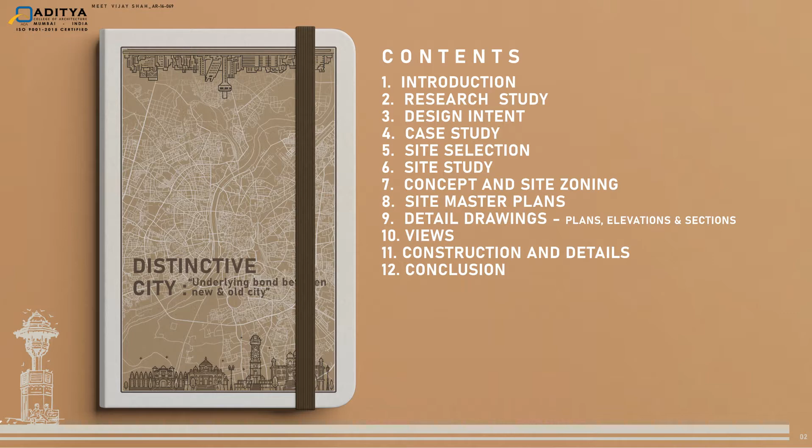Starting with the research study, a brief about the topic: this is a city-based thesis research project. Cities are a process of continuous evolution and development over a period of time. As a city continuously evolves, it carries certain social, physical, cultural, historical, economical, and conflict characteristics of its own. Constant change in a city by rise in population, expansion, development, urbanization and modernization leads to a certain loss of identity and characteristics for a city.

Now, talking about how to define a particular city, one can have a mental perception of a city and link it to one of its images in four variant city characters, which can be defined as follows.

The five physical elements of mental mapping of a city, from Kevin Lynch's book, The Image of the City: city impression, where a city is known by its people, their language, appearance and culture; city symbol and landmark, where a place becomes an image of a city; and city's collective identity, which differs from a local inhabitant to a tourist perceiving the city.

This thesis research presents a framework for understanding the relationship of a city's character and identity, taking the case of India as one of the unique cities, Ahmedabad, which beholds the uniqueness of being titled a UNESCO World Heritage City as well as a Smart City.

The city of Ahmedabad is situated on the banks of the Sabarmati River in Gujarat, India. The Sabarmati, being one of the longest rivers in Gujarat, divides the entire city into two parts: the western zone and the eastern zone, which are the new city and the old city.

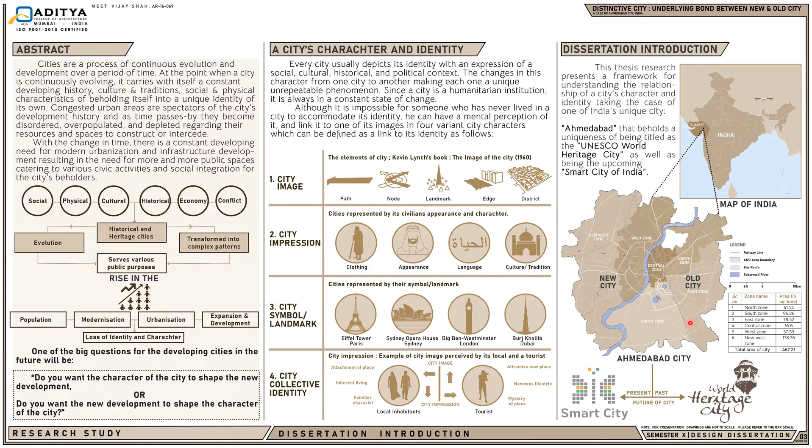For administrative purposes, the city has been particularly divided into six different subzones.

In order to proceed with the research study, it was conducted in five stages as listed in the research methodology chart: starting from literature review, then survey analysis, certain case studies, then site study, study of government proposals, then ending upon research inferences, which ultimately resulted in a site program derivation.

Here is the timeline study of Ahmedabad. The city beheld successive periods of political dominance under Mughal, Maratha and British rules, built upon the initial footprints of the Sultanate era. This historic timeline added a natural process of cultural exchange in the city over time, and the evolution resulted in a multi-layered and exceptional cultural significance of the city.

Talking about the evolution and growth of Ahmedabad, a mega city like Ahmedabad is progressing faster day by day in its expansion and growth. The city started expansion in the eastern part in the pre-independence period, that is the old city, and now it experiences expansion and surge in growth in the western part after the post-independence period, which is the new city, recalled as the new Ahmedabad city.

The two functioning government bodies have developed the Ahmedabad city over the past decade in various forms of planned growth and city expansion: well-developed road networks, civic amenities and public buildings, a well-developed public transport system, and land use and development schemes.

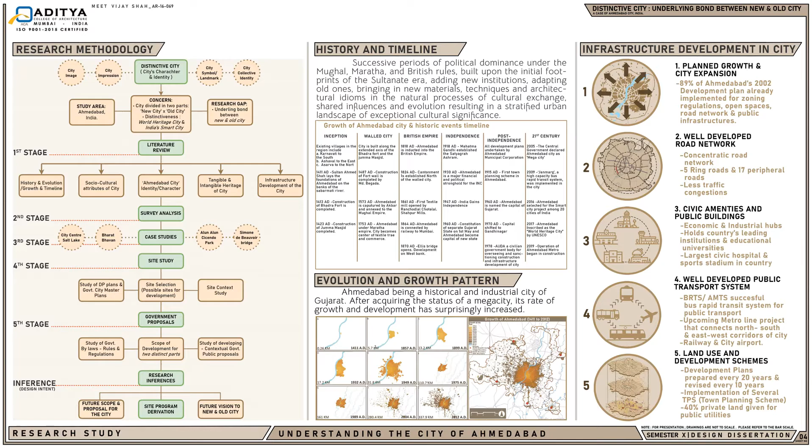Talking about the need for public spaces in cities: congested urban areas are spectators of a city's development history, and as time passes, they become disordered, overpopulated, and depleted in terms of their resources and spaces to construct or intercede.

With the change in time, there is a constantly developing need for urbanization and infrastructure development, resulting in the need for more and more public spaces catering to various civic activities and social integration for the city's residents. The municipal government body of Ahmedabad city has been constantly working on developing more public spaces to cater to the city's public needs.

The historic city of Ahmedabad consists of built heritage, which also forms a part of cultural heritage and has different tangible and intangible layers in the form of heritage complexes and sites, cultural landscapes, and intangible heritage consisting of festivals, people's lifestyles, cultural celebrations, rituals, and certain artwork inherited through practices in the city.

Speaking on the factor of tourism and development, ever since the city got the UNESCO prestigious tag of World Heritage, the footfall of domestic and international tourists has subsequently risen. This is the tourist development plan of Ahmedabad, where Ahmedabad also becomes a destination for domestic and international tourists to witness a lot of heritage and prestigious sites located across the entire city.

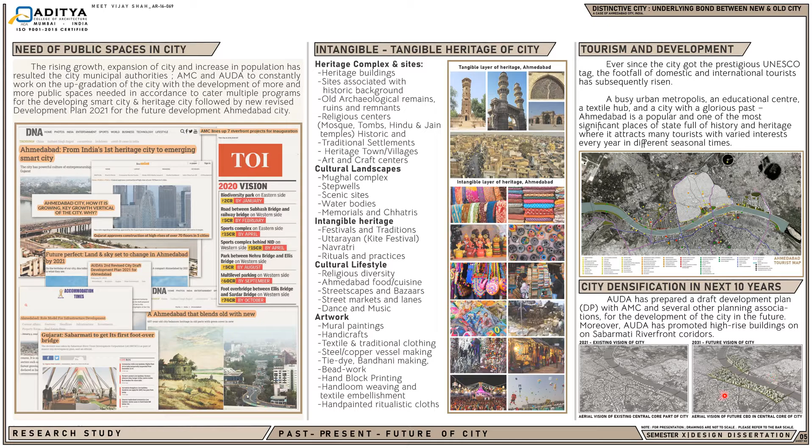Talking about city densification in the next 10 years, the city will experience more densification and high-rise growth in the central core part after the growth of an envisioned central business district as sanctioned in the development plan of 2021 by the government body of Ahmedabad. Thus, requirement of more and more public spaces in the city to cater to such large expansion and growth.

Now coming to the stage of design intent formulation. A study was conducted to analyze how public spaces become a government revenue model, where the city government initiates addition of public and civic spaces which becomes a self-revenue source model not only for the city government but as well as the city and its stakeholders.

If we talk about hypothesis, I conclude that the integration of various cultural, social and commercial activities, when fostered in the form of a modern contemporary landmark, can bridge the underlying bond between the new and the old city as a future-proof development, balancing the identity and historic characteristics from the past towards an impressive future for a developing city.

Bridging the gap between the new and the old city in case of Ahmedabad, certain parameters for design consideration were evaluated first before starting with the designing process.

Characters and identity of the city were extracted to translate them into resulted programs that will be ending upon a design conclusion.

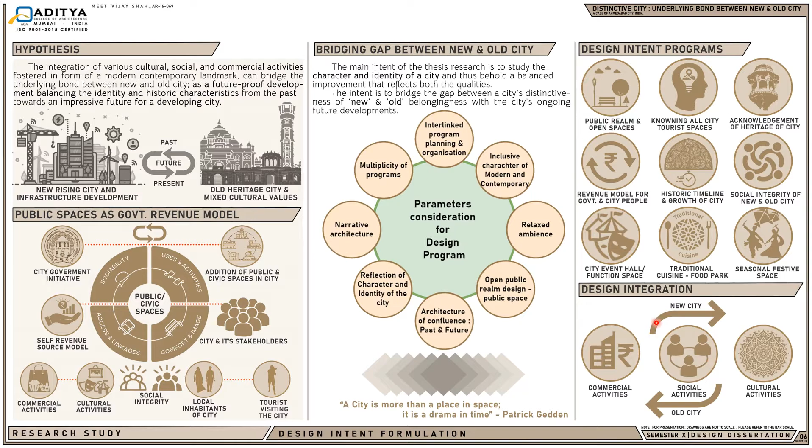And thus, a design proposal was established with the focus on integration of commercial, cultural, and social activities that exchange its value between the new city and old city of Ahmedabad.

The research study involved conducting several case studies, among which two were domestic and two were international. The prime focus of case studies was to study the different parameters and functioning of public projects in response to their context. The conclusion of the case studies resulted in the identification of different programs and scope of development for public spaces in a city.

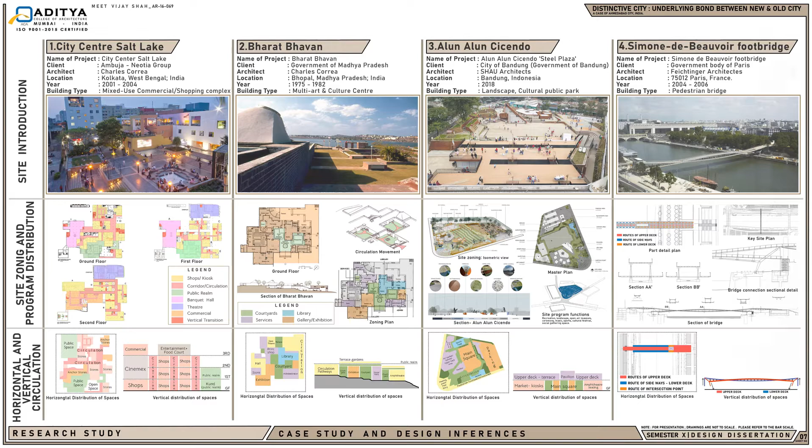Now, talking about site selection and site study, since it's a public space development proposal, the site was selected in the central core part of Ahmedabad, well connected with all the sub-regions. The Sabarmati riverfront corridor has always been a prominent heart to the city of Ahmedabad, fetching the development of more and more public space proposals on both its riverfront edges.

The idea was to select two sites, one on the western edge in the new city and one on the eastern edge in the old city. Both the existing sites selected are connected by the medium of an existing proposal of a pedestrian bridge in the central part of the Sabarmati river.

Going ahead, mapping was done of all the government proposals in the Sabarmati riverfront corridor context to our selected site, so that our design proposal doesn't overlap with any of the existing government public space proposals in the city context.

Then study of existing site sections were done where both the sites have similar characteristics of lying next to a riverfront, with three levels formed due to an upper promenade, a lower promenade, and then our raised selected site, which is 5 steps above the level of the upper promenade on both the riverfront edges.

After the selection of the site has been proceeded, as the selected sites fall under the context of a new city and old city with two distinct edges, several image mappings of the nearby site context plots had been done. Mapping of all the historical landmarks, public spaces, public transport mediums, and heritage spots was done.

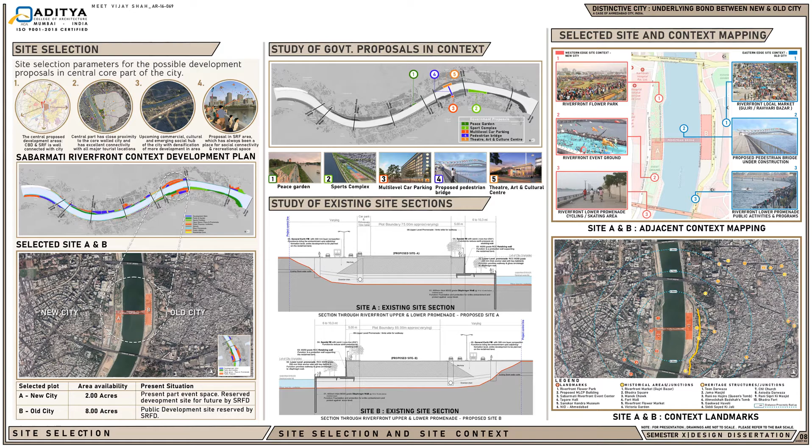Site study and selection involved working on different layers of contextual mapping in the form of the location plan, figure ground mapping, road network plan, climatic analysis, contour mapping, and site accessibility map, where the site has so many access points in terms of the riverfront promenade edges as well as the road, and then comes the central pedestrian bridge.

This aerial view basically explains the entire site in detail, where Site A, which is a 2-acre plot, lies in New Ahmedabad city, and Site B, which is an 8-acre plot, lies in the old Ahmedabad city; in the central part they are being connected together by the medium of an existing pedestrian bridge being developed by the government body.

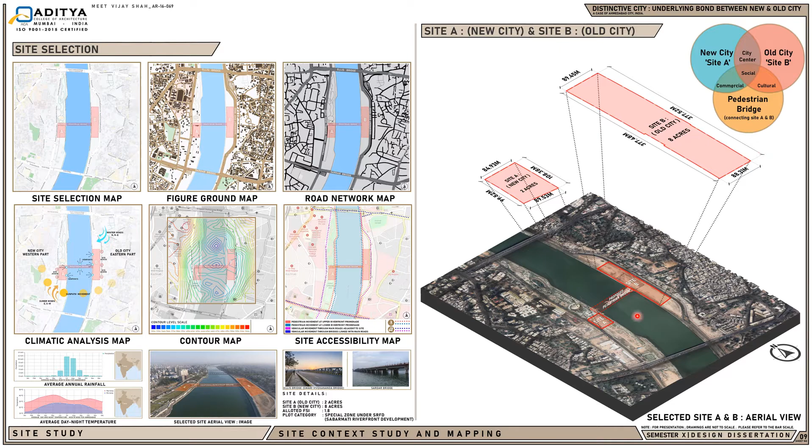The focus is to make the new city plot, Site A, having commercial activities, connected with the old city plot on Site B, having cultural activities, where socially they get integrated together by the medium of an existing proposal of a pedestrian bridge being developed.

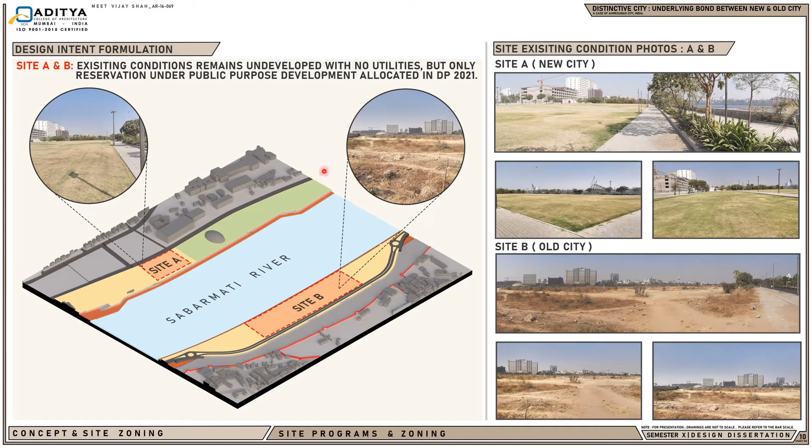Coming to the stage of design intent formulation. Here on the slide are shown images of Site A and Site B. As we can see, the existing conditions remain undeveloped with no public utilities on both the ends of the selected sites, but only allocation under public purpose development zones in DP Plan 2021.

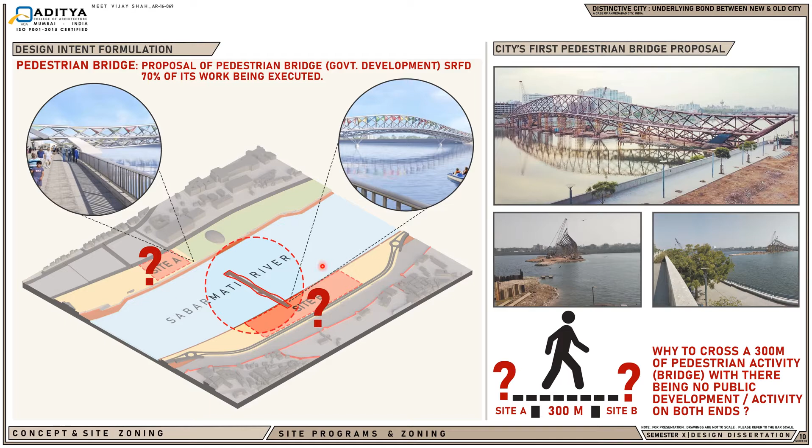Here comes the present scenario where there's an existing proposal of a pedestrian bridge being developed by the government body of the city. 70% of its work has already been developed, as seen in the images on the right hand side corner. The question arises: why would someone cross a 300 meter pedestrian bridge with no utilities or public spaces developed on both riverfront edges?

Concluding our hypothesis, we state that future proposals of public space development on both distinct edges will be connected by the medium of this existing pedestrian bridge proposal. Thus, we integrate cultural activities on Site A in the form of an urban heart and city seasonal plaza, and commercial activities on Site B in the form of a city civic center catering to various public activities, socially connected by the pedestrian bridge linking Site A and B together.

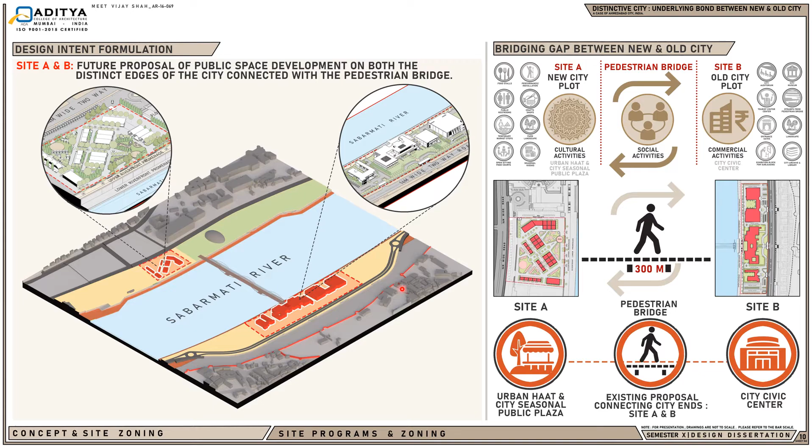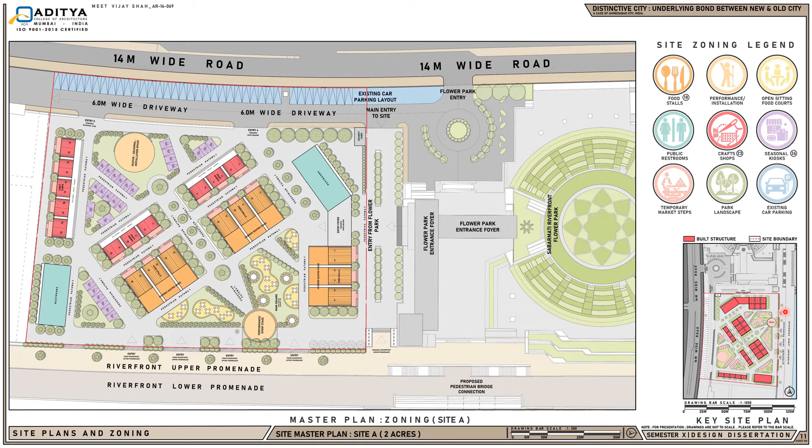Now understanding the proposal of the urban heart and city seasonal plaza on Site A, there are many programs spread across the entire site, namely food courts, open sitting spaces near these food courts, permanent craft shops, temporary seasonal festival kiosks, performance area and installation spaces, and a distinct landscape spread across the entire site. Understanding the site's program derivation, we go by a vacant plot near the Sabarmati riverfront edge.

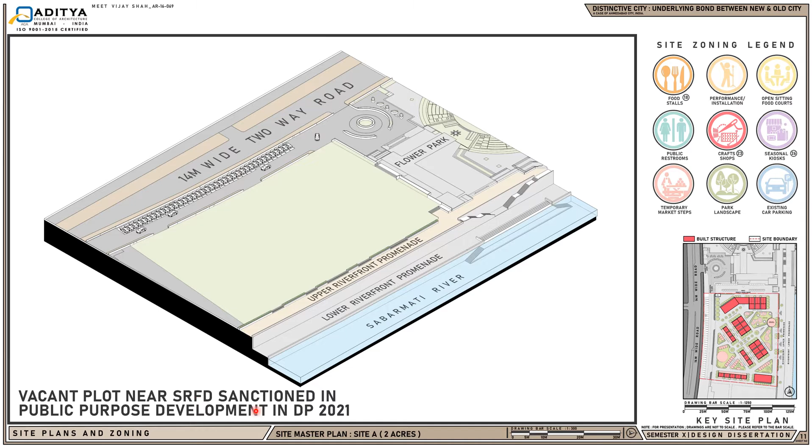This plot has been allocated for public purpose development in the DP Plan 2021. Our site has been demarcated. There are existing multiple entry exit points from all four corners of the site. The site has been diagonally divided into two parts connecting two distinct entry exits diagonally.

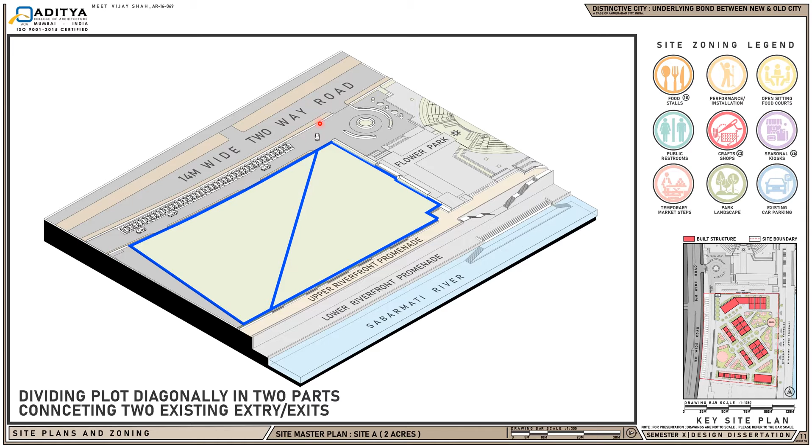Formation of public movement access around the existing entry exits was done. Allocation of subdivided plots was done. Equal distribution of green spaces was done along the pedestrian movement accessways.

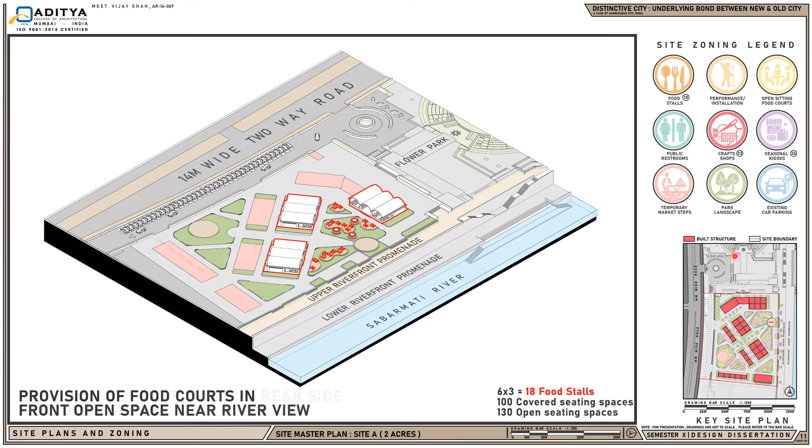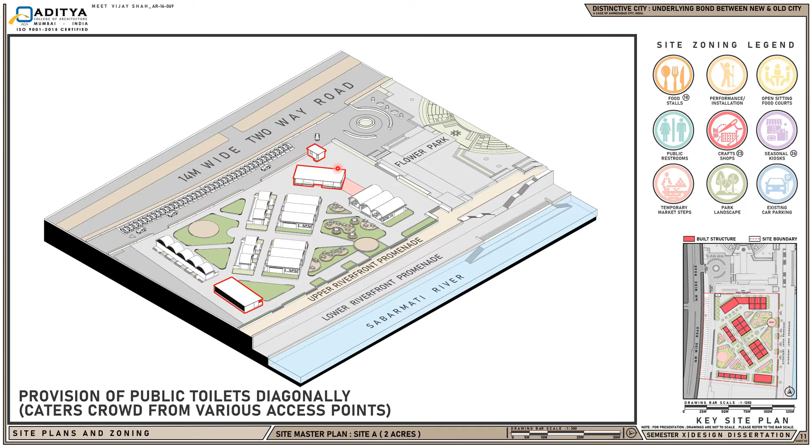Start of the design stage begins here. 18 food stalls and open sitting spaces have been allocated towards the riverfront view. On the rear side of this plot, permanent craft shops have been allocated. Then come two diagonally placed public restrooms which cater to people coming from all four entry exit points.

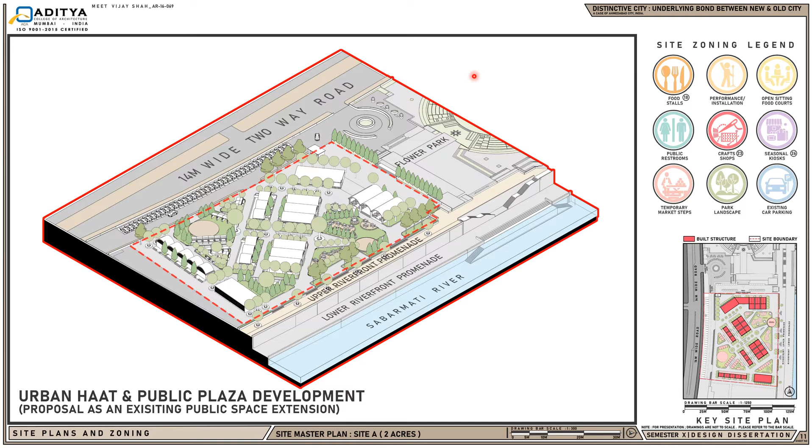Lastly, provision of seasonal temporary kiosks was done at the back end. A largely distributed landscape area has been spread across the entire site so that it becomes an extension to the existing public space, which is a flower park on the right hand side end. In total, it becomes an urban haat and public plaza development proposal.

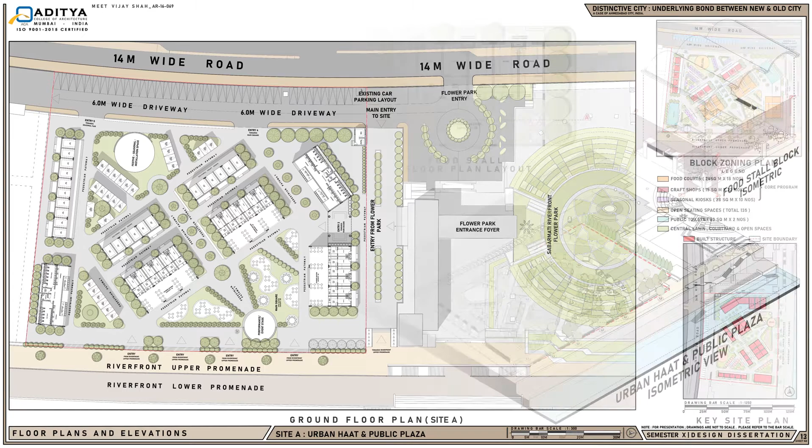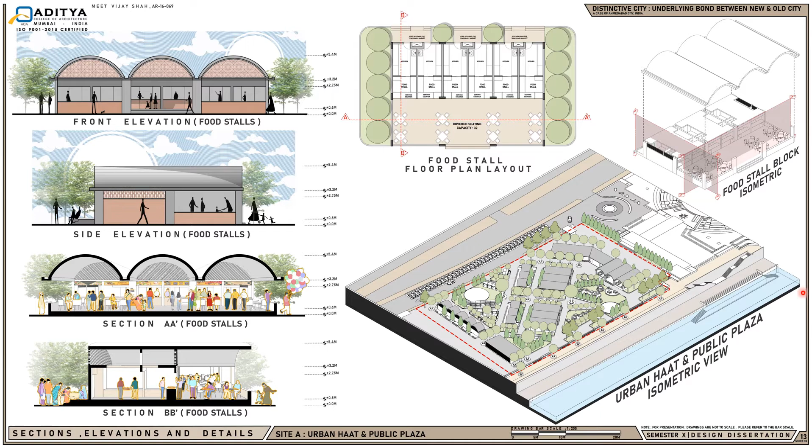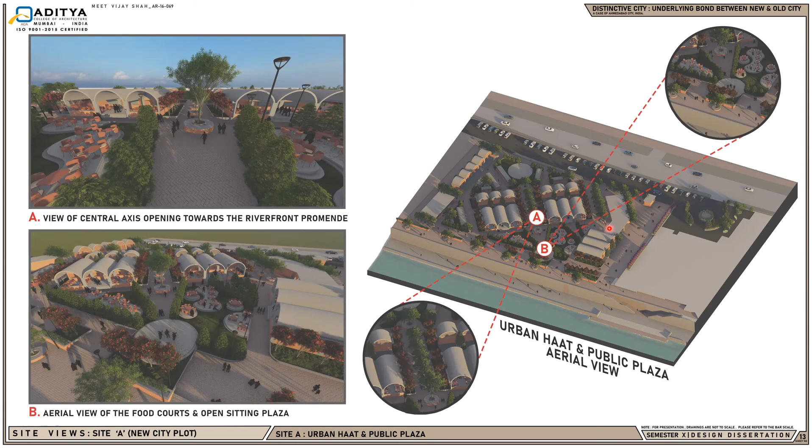Now coming to the design conclusion of Site A, which is an urban haat and public plaza. This is the view of the central axis which opens up towards the riverfront promenade. The second view provided here is the aerial view of the food courts, with a view of the riverfront end.

The next views provided over here are demarcated for the food stalls which are provided on the frontage. Above is the exterior view of the open sitting spaces and below is the interior view of the food courts.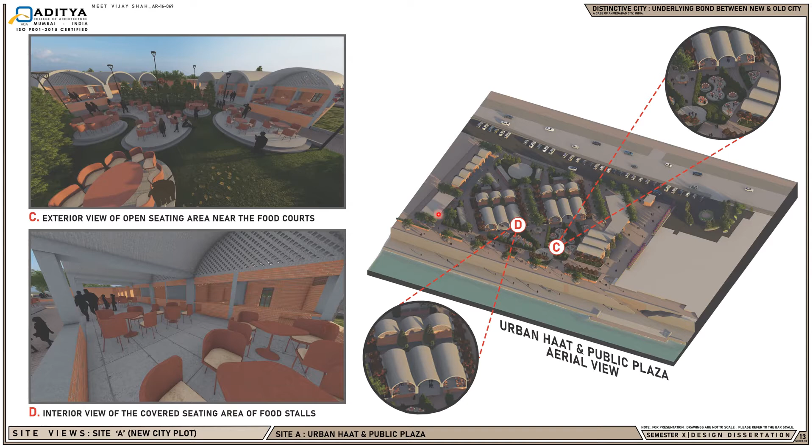So like the lower promenade, the upper promenade with multiple entry exit points towards this public plaza being developed, which becomes like an extension of an entire landscape also being developed throughout the entire site just right to a flower park.

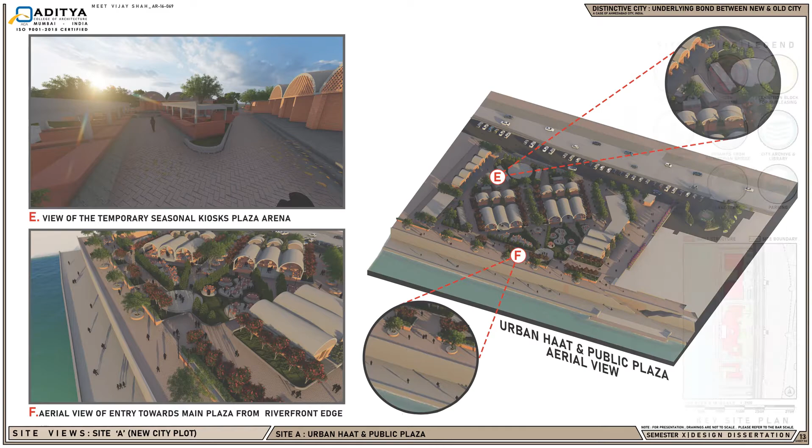Now coming to the design proposal of Site B, which is a civic center, it caters to various public development programs spread across the entire site of 8 acres plot, namely an auditorium and a multipurpose event hall. In the central part, there is a city museum, a tourist visitor center, and an exhibition gallery for subleasing.

In entirety, it's a single block divided into three zones. At the back end, it gets connected by the medium of the proposed pedestrian bridge on the fourth-story level. And lastly, on the left-hand side edge, we have a city archive and library and research center.

This entire plot has been divided into different zones. To understand the same as per form derivation, we go hereby. There was a vacant plot near Sabarmati riverfront sanctioned in public purpose development in DP 2021.

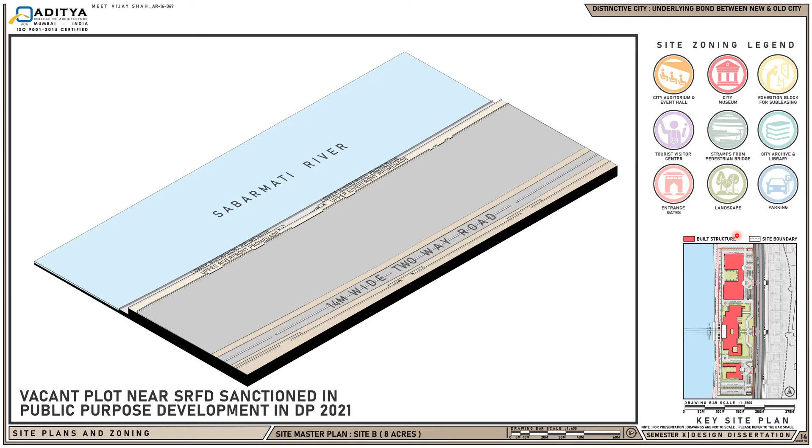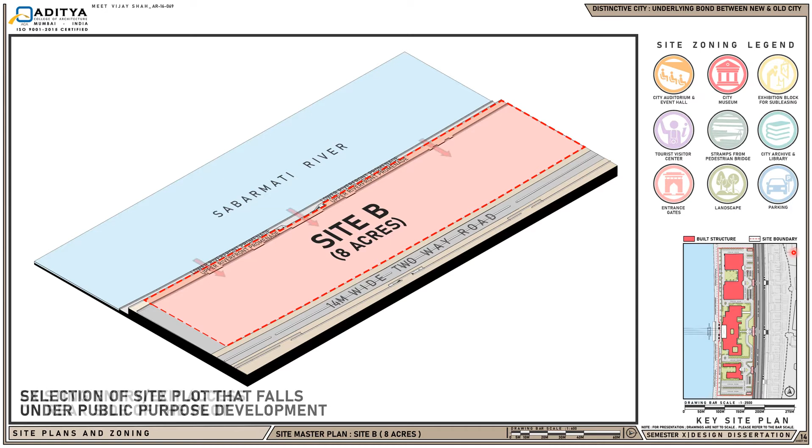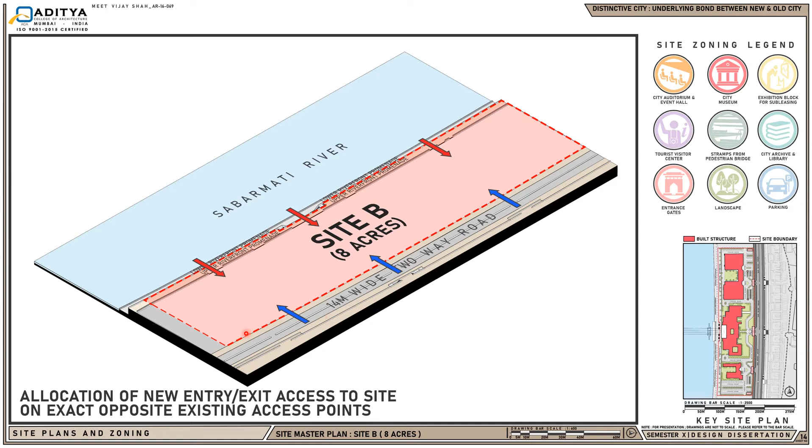Our site gets demarcated at 8 acres. Over here, the upper promenade is also a part of our site since it is not yet developed. Later on, there are three entry exit points coming from the upper promenade. We demarcate three more entry points proposed which are coming from the frontage of the roadside, exactly opposite to the existing access points. The entire plot gets subdivided into three parts.

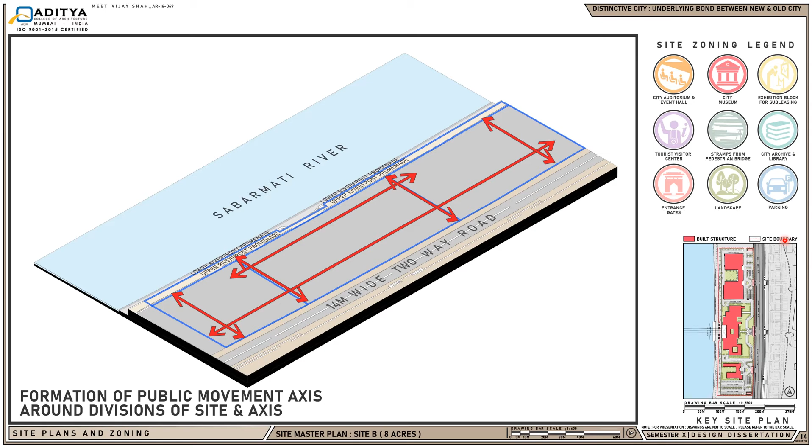Formation of public movement axis around the division of site has been done. Later on, the entire site gets subdivided into three different blocks, which are A, B, and C. According to the area required for the certain program distributed, all the blocks' space area has been allocated.

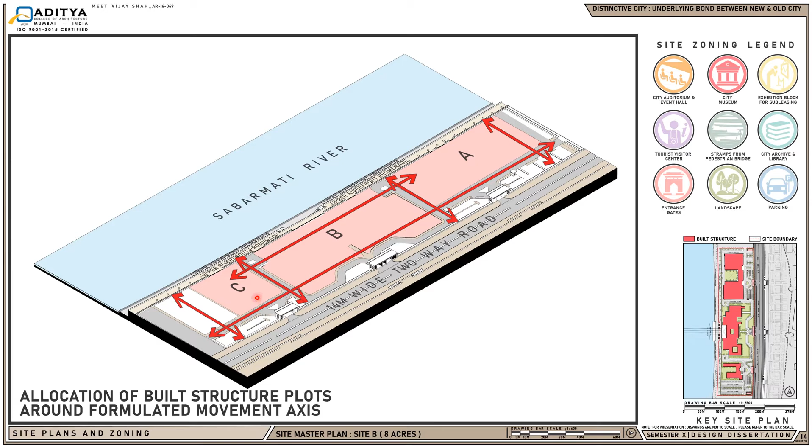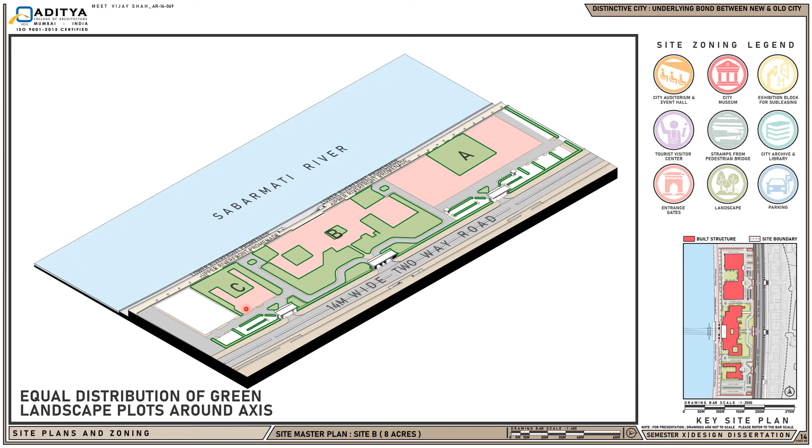Later, provision of equal distribution of green landscape plots has been done on the frontage as well as on the rest remaining two blocks on the rear side too, towards the riverfront. Provision of parking spaces on the frontage and sides to shorten the access distance. For block A also we have a basement parking.

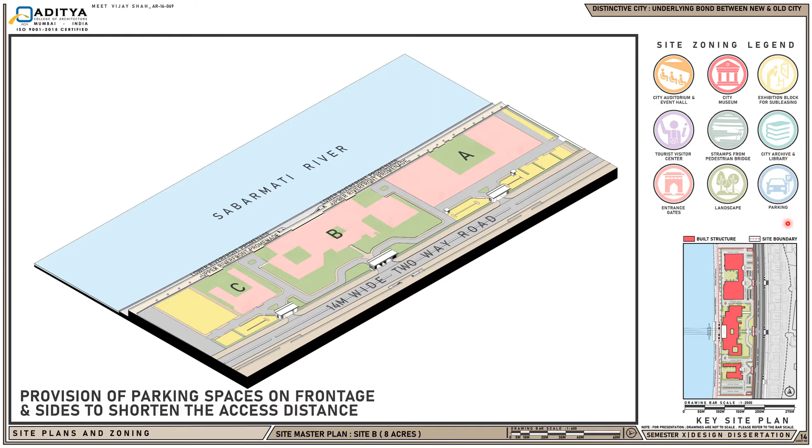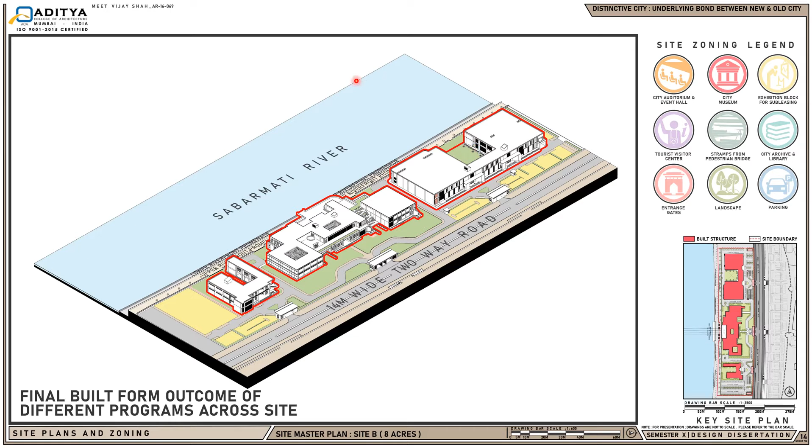And then comes our building blocks, namely the first A block is our auditorium and multipurpose event hall having a central courtyard opening towards the riverfront. Then in the central part of the site we have a city museum, a tourist visitor center, as well as an exhibition gallery for subleasing.

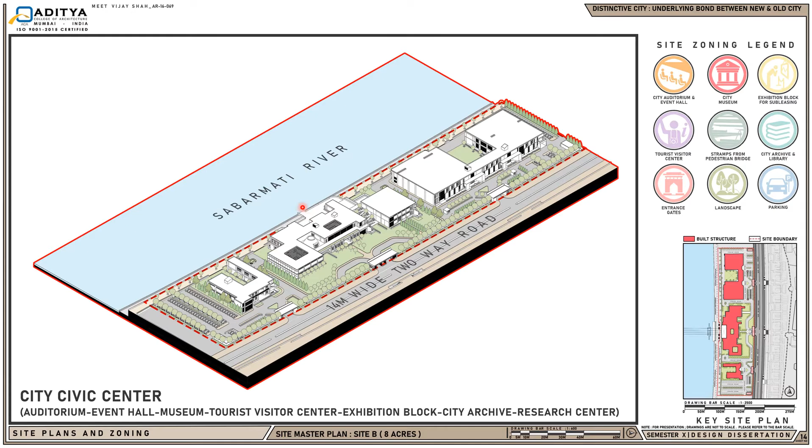At the back end, it gets provided and connected by means of an existing proposal of a pedestrian bridge on the first floor level with an exit provided in the form of stramps for people continuing to the end. And on the left-hand side, we have a city archive and library.

Now understanding the detailed drawings of Site B individual blocks. This key site plan on the right-hand side bottom corner helps me to relate with whichever building block we are discussing on the slide.

Basically, this is the ground floor layout of Block A, which is a 750-seater auditorium as well as a two-story multipurpose event hall. This is a government self-revenue model building which caters to several programs, functions, and events of the city.

If we see this block, there are two entries provided on the frontage from the roadside. This block zoning plan indicates the two core functions, which is a 750-seater auditorium and, in color blue, the two-story multipurpose event hall, which is pushed at the rear side towards the riverfront.

The entire two blocks get connected by the medium of a centrally divided open space, which is an open courtyard, which becomes a private space with a view of the riverfront to cater to several functions.

In this elevational profile, as we see on the frontage where there is this auditorium lobby, waiting lounge and pre-function space. This entire space has been incorporated with double story height as well as passive cooling techniques.

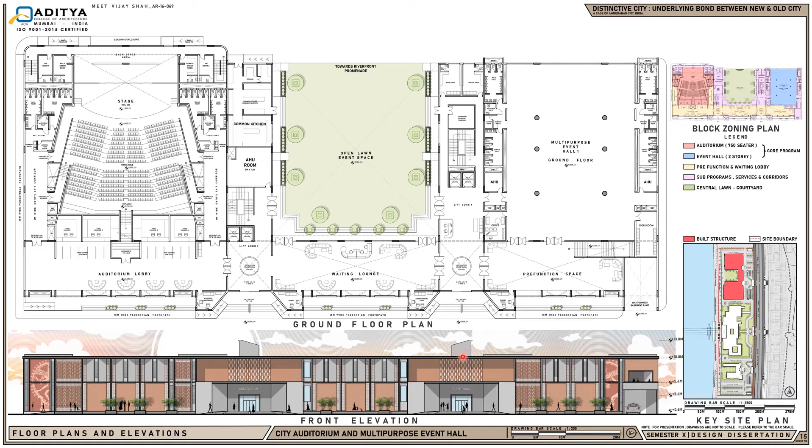The first floor layout of the building block, where the elevation provided on the bottom is of the rear side elevation facing towards the riverfront end.

The central space, which is the courtyard, helps me understand how it becomes a self-shaded space due to the double-heighted building volume. Over here, this is the two-story multi-purpose event hall having a glass facade completely opening up towards the riverfront view.

This is the auditorium back end where all the backstage services happen, as well as the green rooms, which have been provided on two different levels, opening completely towards the riverfront end.

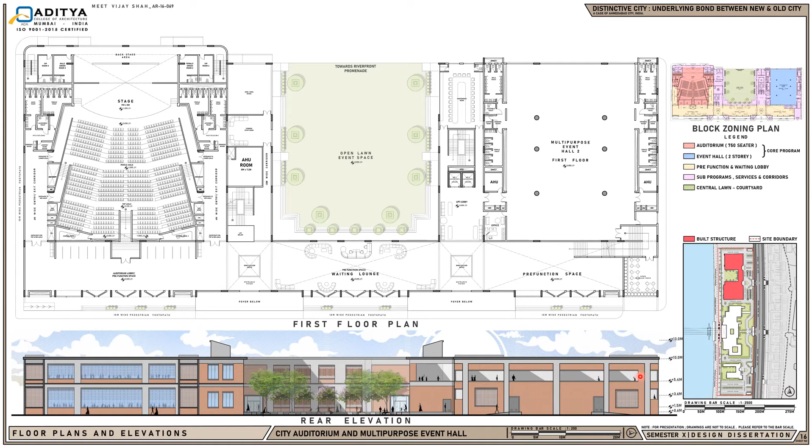Now coming to the basement layout of the block that we discussed earlier. Basically, this is a car park basement divided into two zones. As we see in the color-coded basement zoning plan on the top right-hand side corner, the red color on both the edges of the basement indicates a stacked car park system.

In the central part there is a single car park system, since the floor height in the central part is low due to a central courtyard above, as we see in the below sectional profile, which helps us understand all the different levels that function in this basement profile.

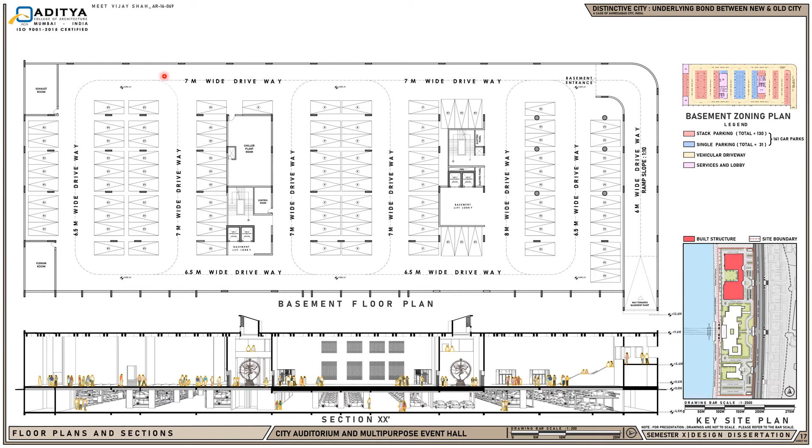The yellow color being highlighted is all the circulation route for the vehicular entries and exit in this particular basement layout.

This slide indicates the section cut through the central core of the auditorium and the section cut through the central courtyard of the building block.

As we see in this first section, on frontage this is the waiting and entrance area with the waiting lobby provided. The entrance directly leads you towards the top aisles. The central part is the auditorium seating, and at the left side the main stage and backstage area.

If we look to the shorter section on the bottom side, cut through the central courtyard, it helps us understand how the single car park system is working at its bottom.

The pre-function space in its frontage caters to the upcoming crowd coming from the entrance area, with a view focused towards the riverfront area, making the entire space both public and private focused.

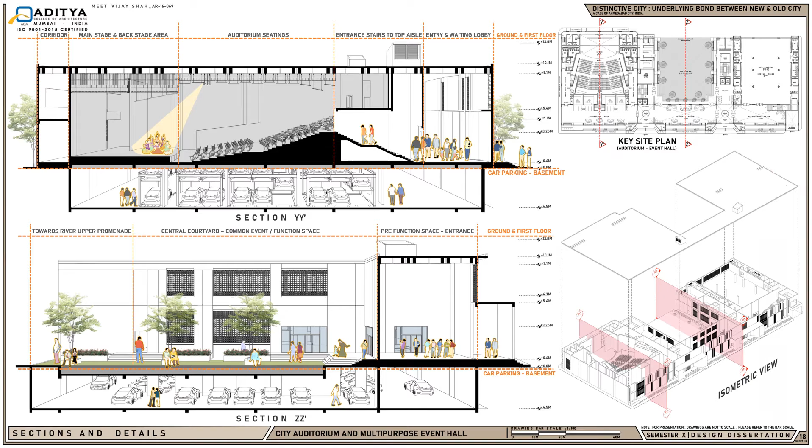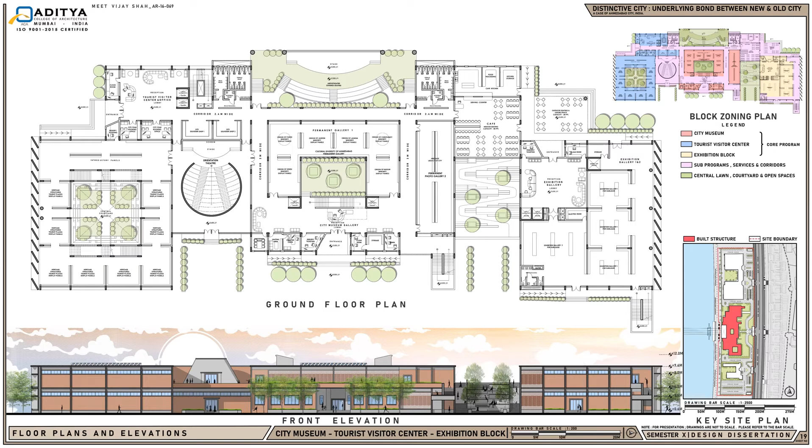Coming to the first floor layout of this building block, this entire block gets connected on the first floor level on the rear side by the existing proposal of a pedestrian bridge, so that people and visitors coming from the bridge can also visit a public space oriented building program block, with certain space allocated and spread across entirely.

All the spaces get connected on the upper level by means of a corridor, and open terraces have been provided so that there is an experience created for all the people to visit the maximum of spaces and certain sub-functions.

People who don't wish to visit this building block can directly exit by means of the stramps provided, which open up to the green space at the front end. On the right hand side, provision has been made for people to enter an exhibition gallery for subleasing where different events happen on a seasonal basis.

The courtyards provided in this entire building block have a space frame sunroof which acts as reflectors, providing shade in the entire courtyard area.

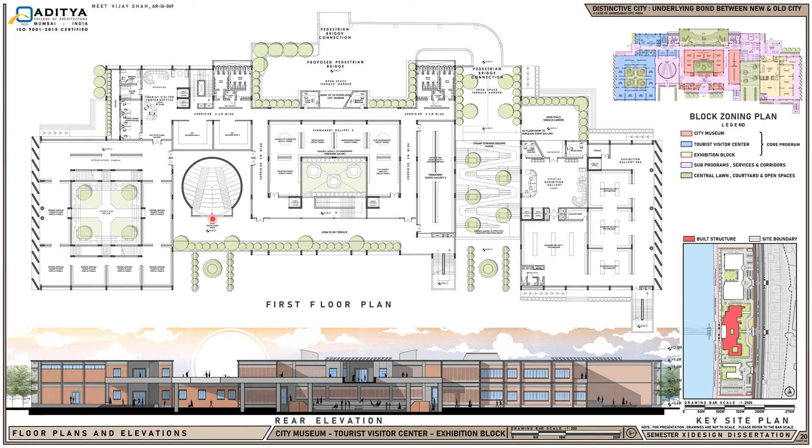These are the longer sections of the building block, which help explain the different spaces experienced by visitors as well as the city's people. In the upper section, the sub-programs don't only function individually; for example, the orientation theater becomes a central core function, serving the tourist visitor center as well as the museum in the central part.

A section cut through the central courtyard helps explain, with the help of the space frame, how the sun reflectors are working. This is the stramp from where there is an exit point created for people coming directly from the pedestrian bridge who wish to exit the structure.

This is the second section provided, which helps explain the different spaces visited by people. These are basically air shafts, also creating more interactive spaces in the sectional profile of this building. Viewing pods have been created in certain galleries so people can peep at what activities are happening at the level below.

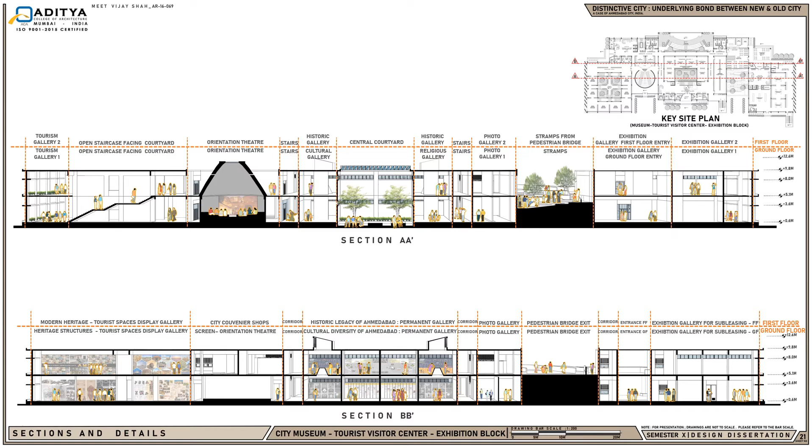These are the shorter sections of the building block. The first section, on the upper end, has been cut through the central courtyard, where we see open staircases created to maximize interaction among people, and the sun reflector space frame, showing how it provides shade.

Looking at the lower section, we see how the rear side of this building block is connected by means of the existing pedestrian bridge. Below, there is a covered sitting space using the sectional profile, ending toward the lower promenade. Here we see different permanent galleries connected at the rear end by these corridors.

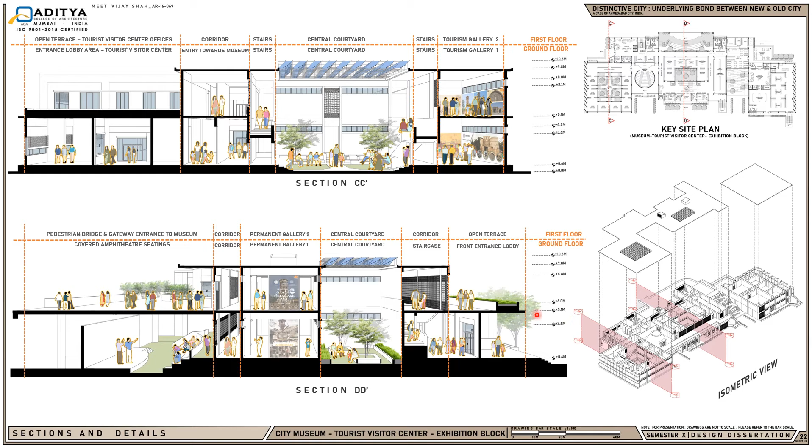In the central part there is a courtyard with frontage open terraces, using jali facades to incorporate passive cooling techniques and create a play of shadow. On the right hand edge, the entrance area is made completely open toward the front edge, opening up on side B.

Moving to the last block, the city archive and learning and research center, relating the ground floor and first floor plan with the color-coded floor plan on the top right. It is a city archive holding workshops, reading rooms, and city archive depots on the ground floor. On the first floor are offices for governments, NGOs, and AMC Ahmedabad to work together on the city's drawings.

On the ground floor, this space is completely open toward the central court. The entire building is divided into two parts by the central courtyard. Clerestory windows are used to provide maximum daylighting inside. The staircase well and reading zones face the riverfront and central court, incorporating maximum daylight, with air shafts provided to escape hot air outside.

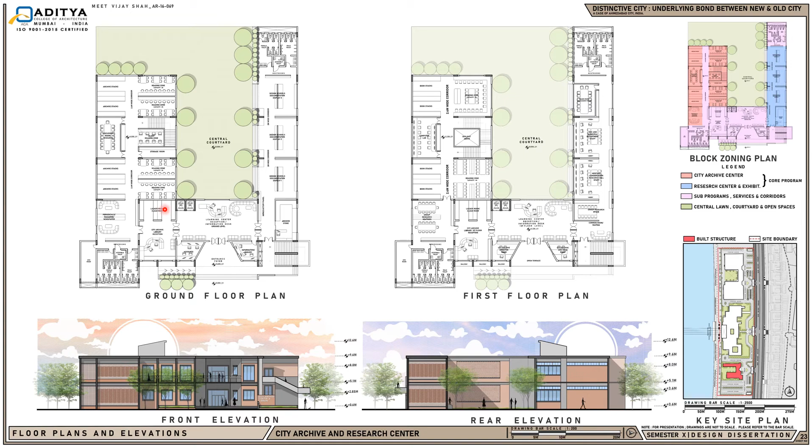These are the sections explaining how this building block works. At the lower side, the section shows how the central open courtyard, facing the riverfront, becomes a common public-oriented space. On the right hand side is an open exhibition area where people from different design schools can exhibit their work.

This building holds drawings and exhibits that are maintained and reserved in the city archive area. The upper part is the section cross-referenced with the key plan, cut through the different reading spaces showing how windows are oriented, with office spaces at the upper end for agencies to work together on the city's development.

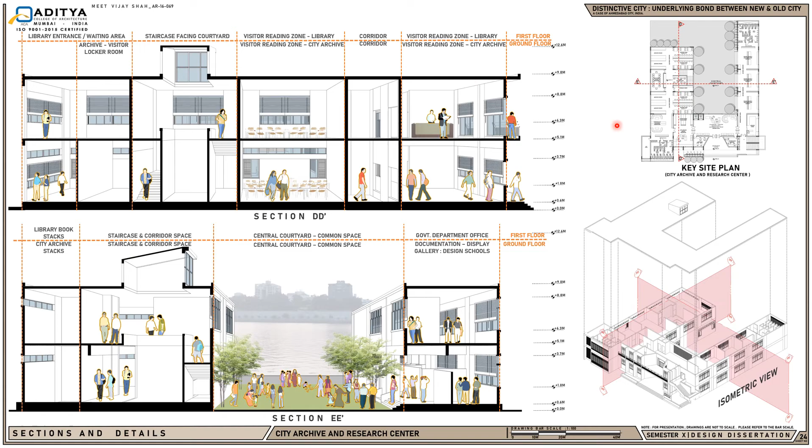These are the isometric drawings of this entire building block, which help us understand the different floor levels and volumes.

Now coming to the aerial view of the City Civic Center as a public space being developed on Site B. This is the aerial view from the main central gateway to the site, where the central block is a museum, the tourist visitor center, and the exhibition gallery for subleasing block. At the lower part, there is an aerial view of the auditorium and the event block. This is the elevational profile of this entire building block, and this is the courtyard which directly opens up towards the riverfront end.

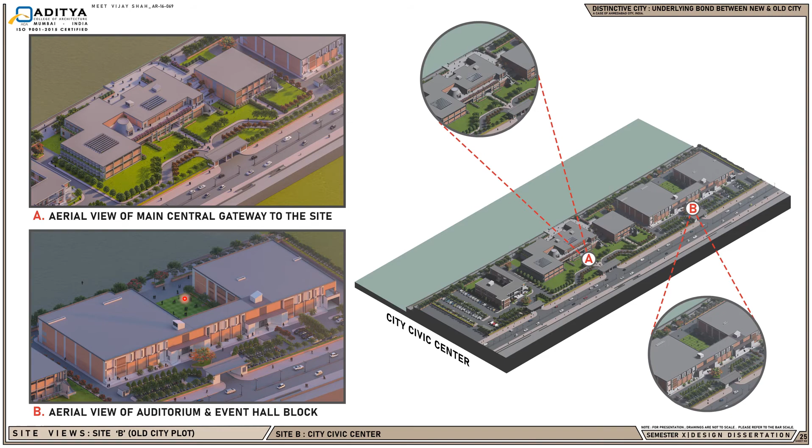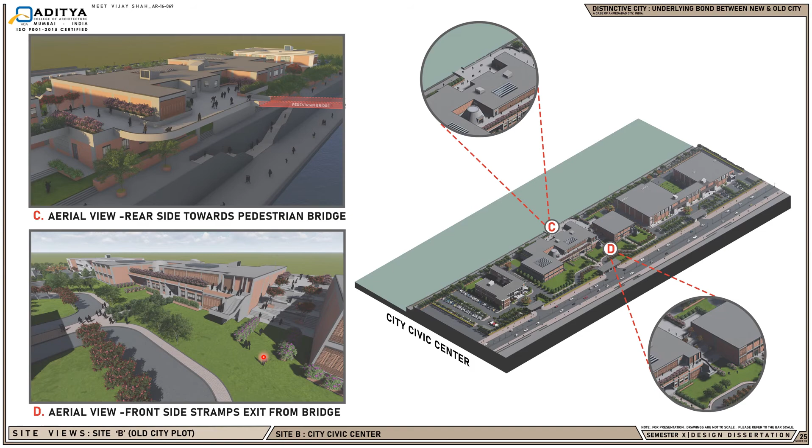Next views followed on the screen here are, this is the central block where it gets divided and joined by the pedestrian bridge, an upcoming existing proposal of the pedestrian bridge at the first floor level. The area of the stramps from which people can directly exit the bridge, which opens up completely towards the frontage of the landscape area.

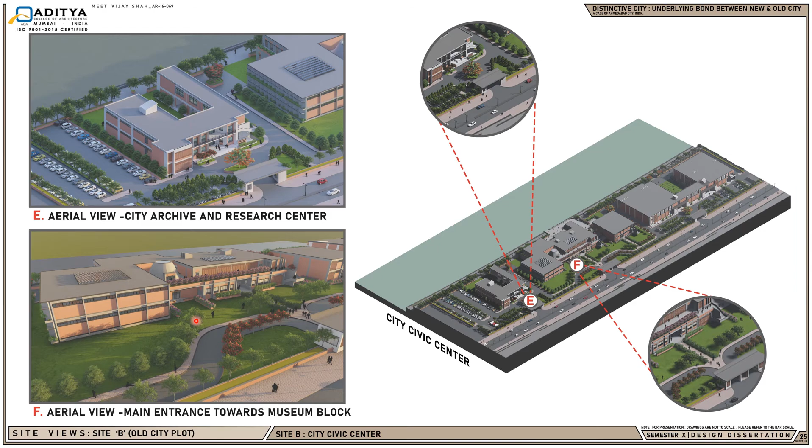Next view is over here. This is the city archival building block and research center, and the aerial view of the main entrance towards the museum block.

And there is a filler slab system adopted in the B block, which is the museum, the tourist visitor center, and the exhibition block. The exposed filler slab system made from earthen pots not only becomes a sustainable medium which helps to reduce the concrete volume of the entire block, but also provides thermal insulation to the structure, making its heat gain lesser coming from the outside.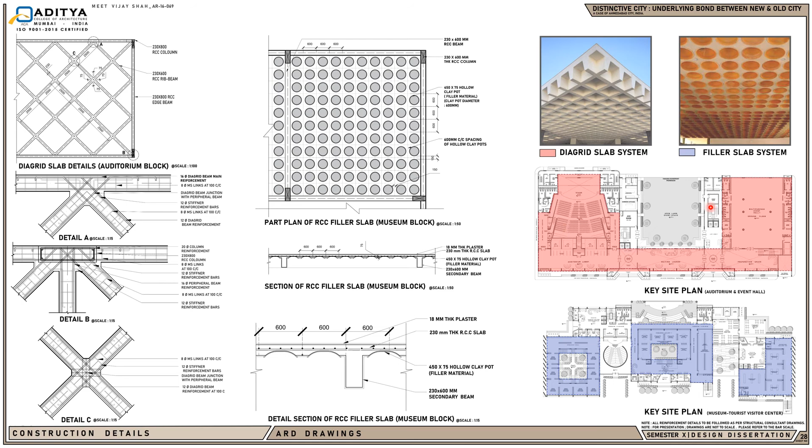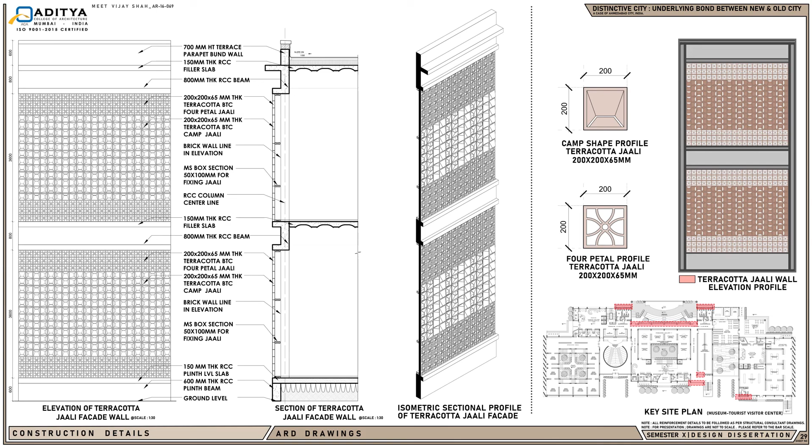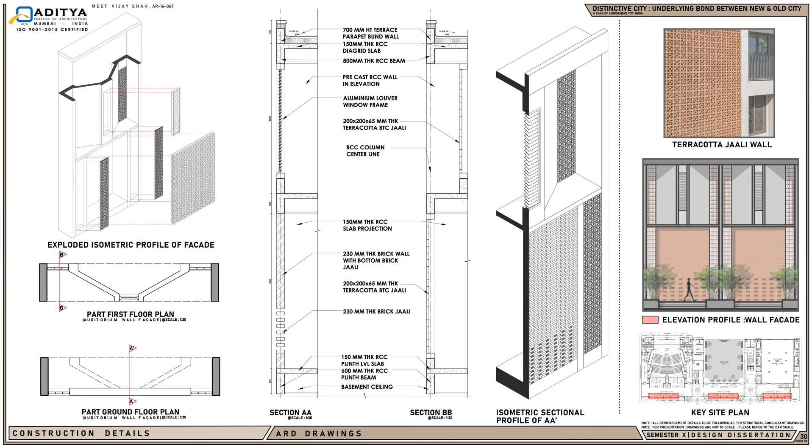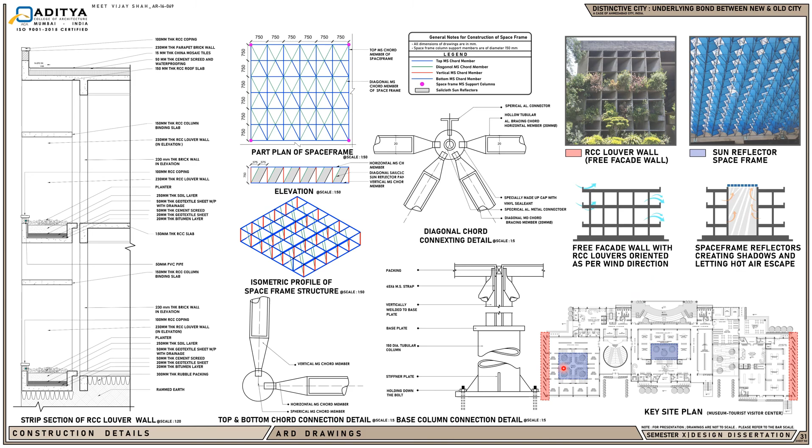Later on, here is the site rear side boundary detail, where the compound wall has been made in the form of a flower bed throughout the entire Sabarmati riverfront promenade end, which is the rear side of my building block. The rest are the provided details of landscape being developed on both our sites.

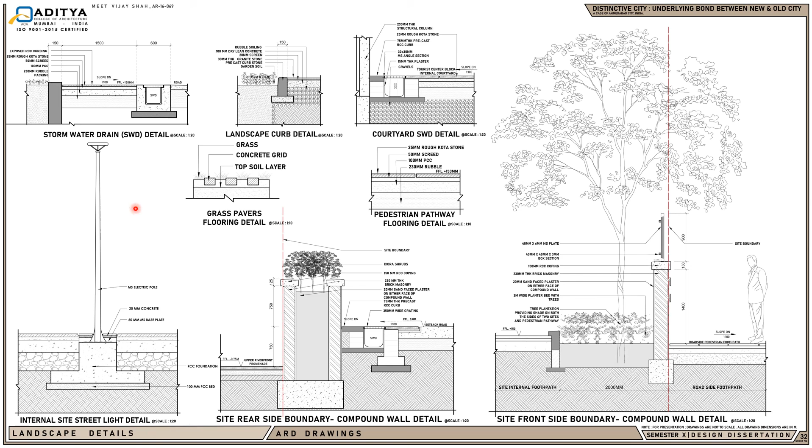Now giving a conclusion note on my entire thesis project, the development of Site A and Site B on both the two distinctive edges of the city, in the form of commercial and cultural activities, socially gets integrated by the medium of the existing proposal of a pedestrian bridge.

Now, visiting the pedestrian bridge for the city and its people not only becomes an activity but also an experience, enhancing and pursuing the several public space functions happening on both the two distinct edges of the city. Thus, this future proposal focuses on a future-proof development balancing the identity and historic characteristics from the past towards an impressive future for the development of Ahmedabad.